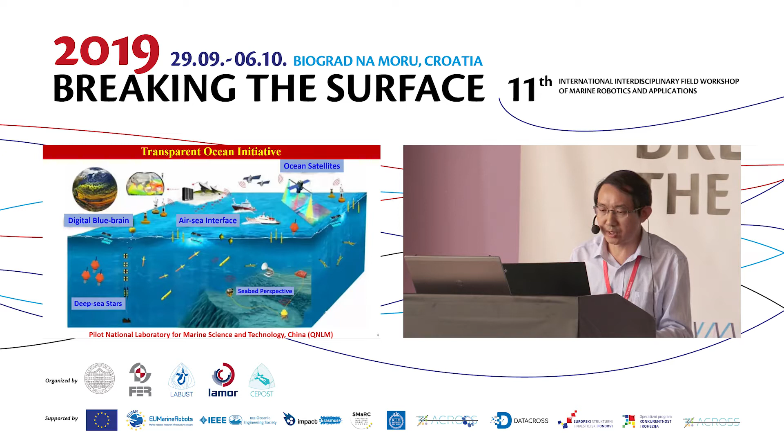the air-sea interface. We would also like to have some deep sea stars by using submerged buoys and some moving underwater vehicles. And finally, we would like to do some seabed perspective by using underwater intervention equipment, and combine all of them to enable a digital blue-brain. So this is the transparent ocean initiative in China.

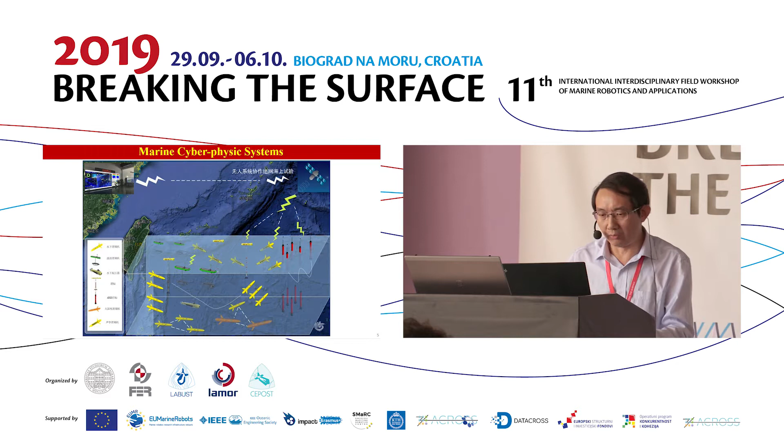In this context, the lab has already launched some marine cyber-physical systems, with gliders, wave gliders, underwater vehicles, surface buoys, Argo, and so on, trying to put them together to do some applications. This is one case, using two Sea Wing gliders to do the tracking and observation of an ocean vortex.

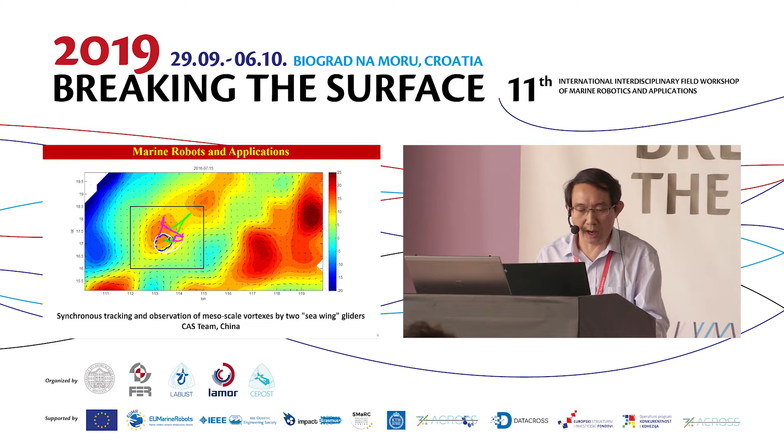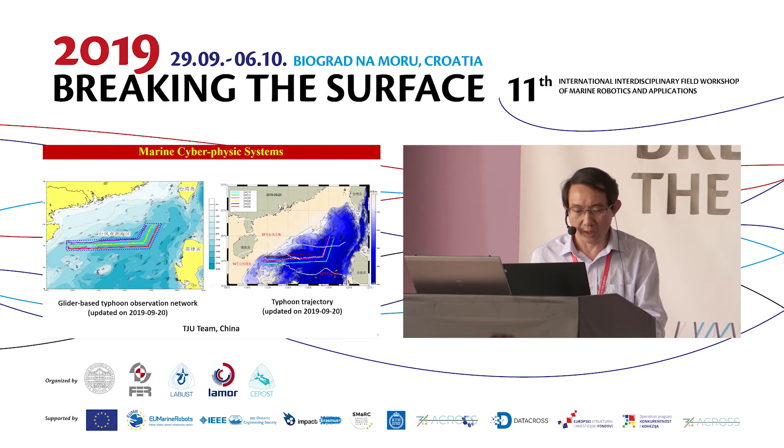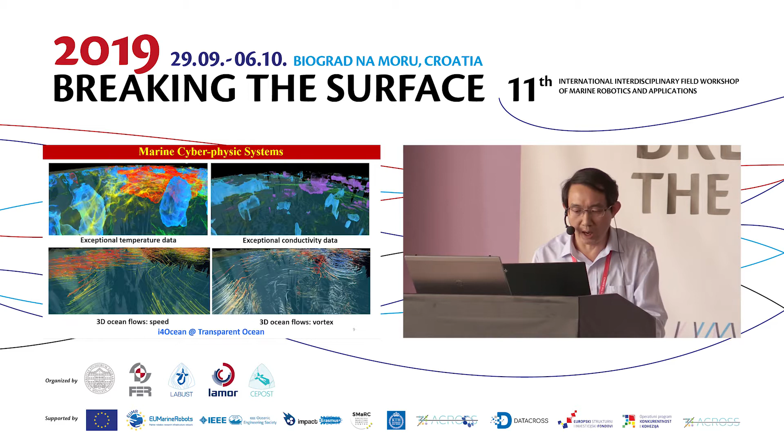In another case, a team in China also did some observation of typhoons by using a group of gliders. They also deployed some wave gliders in the ocean. By using all of these cyber-physical systems, the lab also presents the I4Ocean software to present temperature data, conductivity data, or 3D ocean flows, speed and vortex. So this is the context.

In this context of research in China on ocean science and technology, we would like to develop some new equipment. Of course, we already have some history building autonomous underwater vehicles. This is one case, the CR01 and CR02, which could dive to around 6,000 meters. And this is another series of autonomous underwater vehicles, which my group also participated in, from Zhishui 1 to Zhishui 6, over almost 15 years.

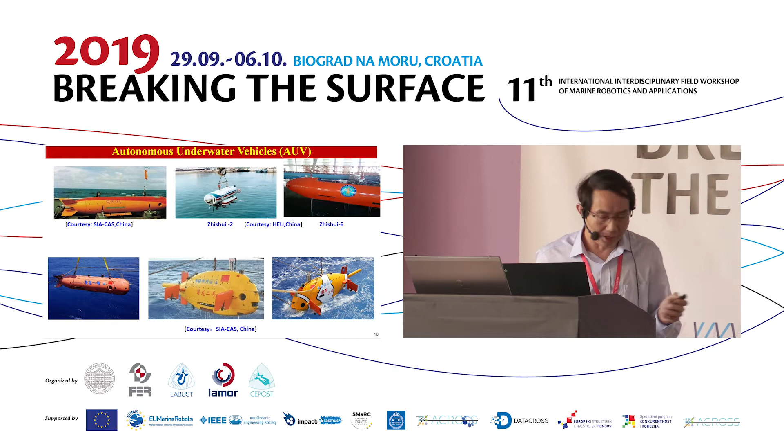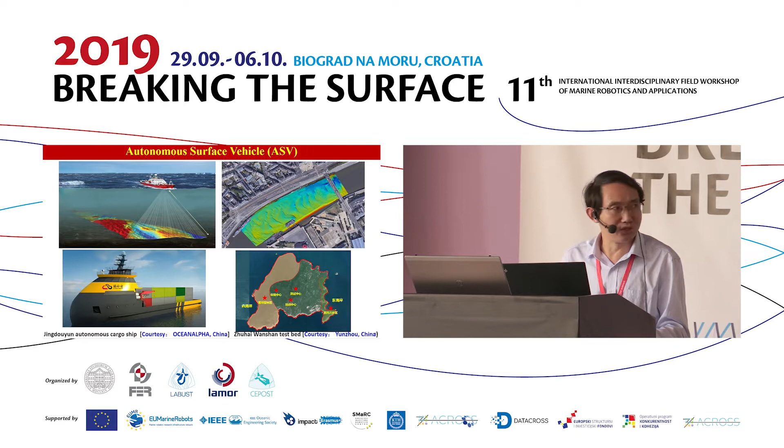In another city in China, they also developed other underwater vehicles named Qianlong 1, 2, and 3. For autonomous surface vehicles, we would like to use them for bathymetry of oceans and rivers, and develop surface vehicles from small size to big size. This is the first autonomous ship test bed in south China. I will present some details later. So this is the context of ocean science and technology in China.

Now, about my team and my research. I work at Huazhong University of Science and Technology, in the School of Naval Architecture and Ocean Engineering, where I lead the lab of advanced robotic marine systems. We have 2 research centers, one national level and one province level. We also have a towing tank since 1977, where we can do hydrodynamic tests and in-water tests for our vehicles.

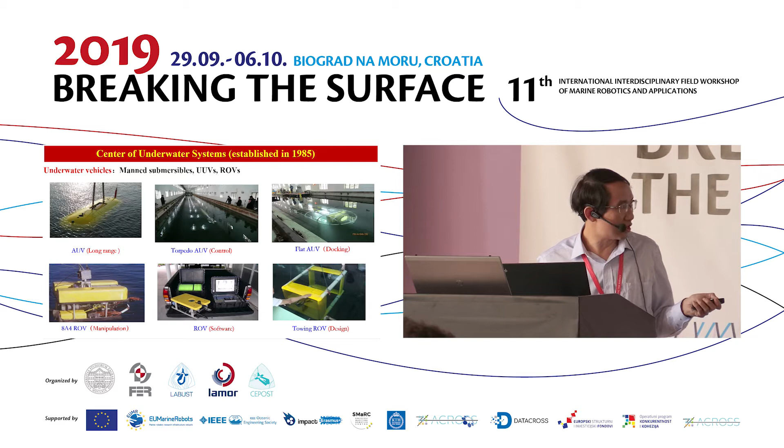Also in the school we have the Center of Underwater Systems, which participates in research on manned submersibles, underwater vehicles and remotely operated vehicles. This is the manned submersible, and this is the autonomous underwater vehicle. We also have a torpedo-shaped vehicle, a flat-shaped vehicle, and a towing ROV. So this is the history of the center in the school.

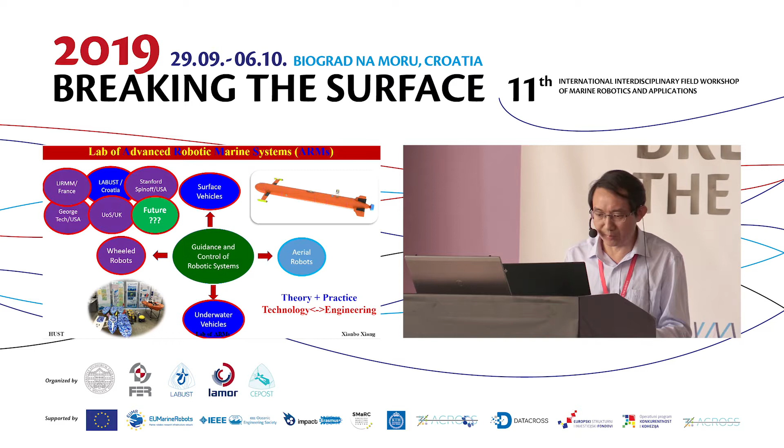As you know, I was one of the members of the European project FreeSubNet. When I came back in 2011, I tried to build the lab of advanced robotic marine systems, mainly focusing on guidance and control of marine robotic systems. We built some surface vehicles and underwater vehicles, use some wheeled robots to simulate the GPS-denied case for underwater vehicles, and also have some aerial robots. We collaborate with previous and new partners. These are some prototypes in our lab.

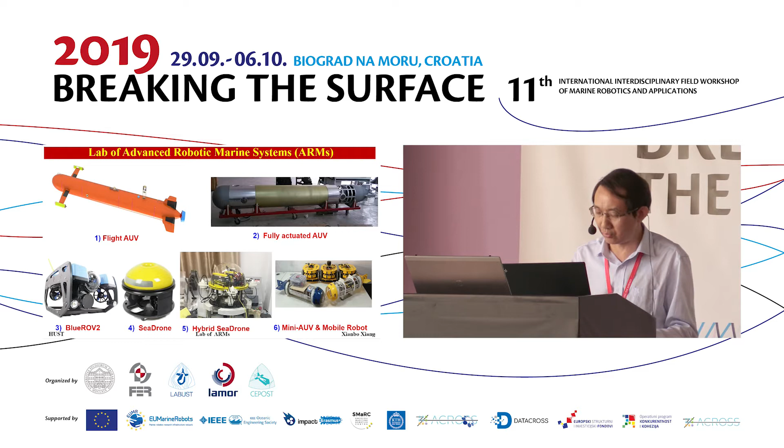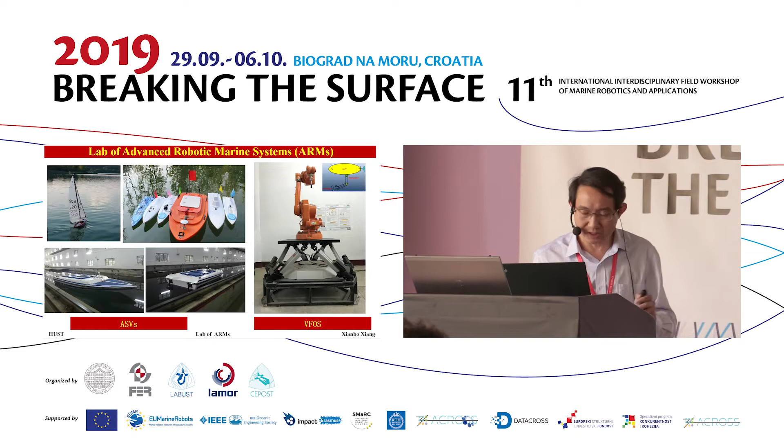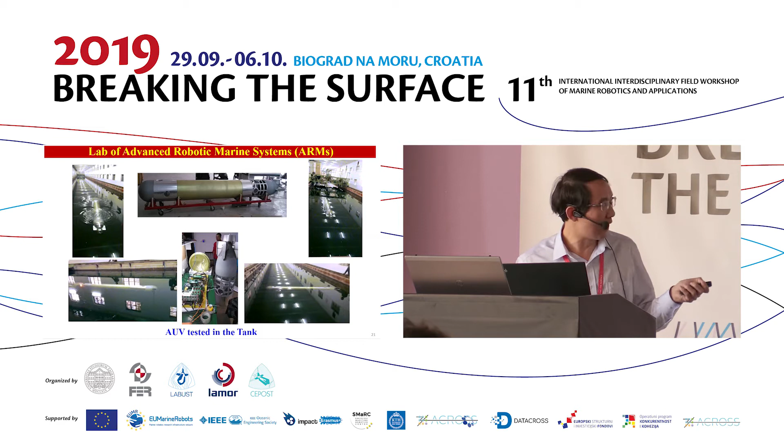The first one is a flight-type AUV used for underwater cable tracking, and this is a torpedo-shaped vehicle. We also have BlueROV2, SeaDrone, hybrid SeaDrone, and some mini AUVs to train students and do research. We also have autonomous surface vehicles, including a sailboat, and surface vehicles in small, mid, and large sizes. We also have a virtual floating operating system to simulate underwater intervention, and this is the AUV test in the towing tank. So this is a rough idea about the lab of advanced robotic systems.

So what we have done, especially I focus on the guidance and control of marine robots. First I will show you something about them.

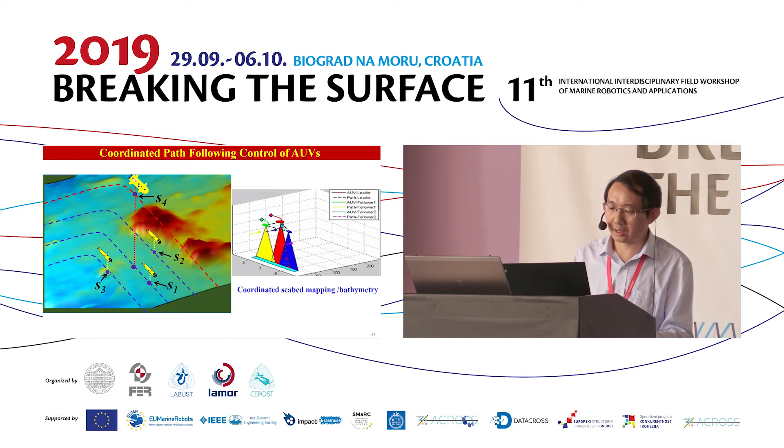The first case: if we would like to do coordinated seabed mapping or bathymetry, we may need a fleet of vehicles, either surface or underwater. So we tried to build some surface vehicles and did experiments with 4 autonomous vehicles in the lake near the university. In this case we tried to build a formation - a diamond formation - to check the coordinated control of multiple surface vehicles.

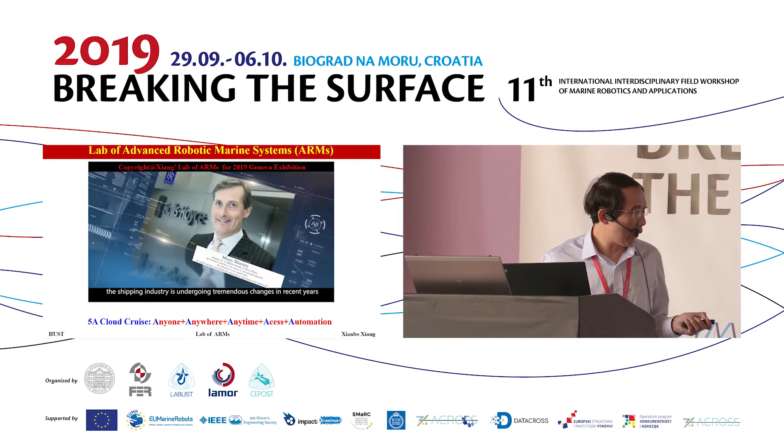This is the idea, and we also did experiments about this cloud-based cruise. It means anyone, anywhere, anytime can access the vehicles to control, manage, or schedule them. So this is the idea.

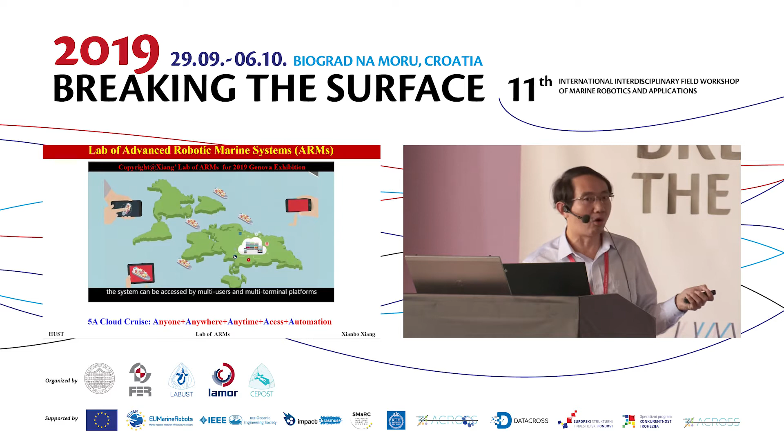We have surface vehicles or ships - if they can access the cloud, then we can control them. We can also have history feedback through this interface, and we did experiments to check this idea.

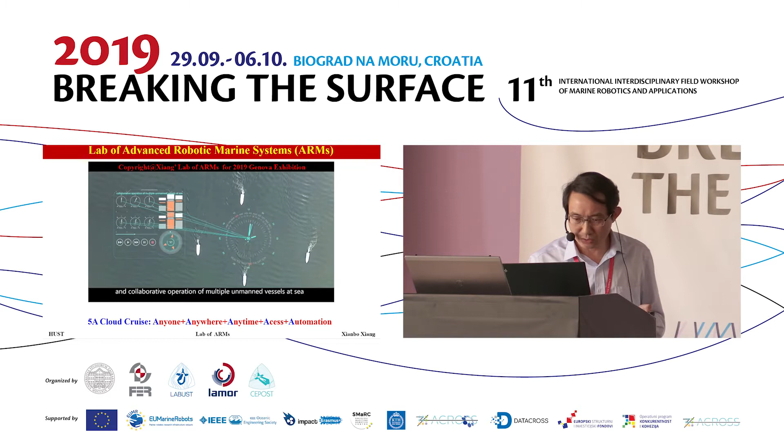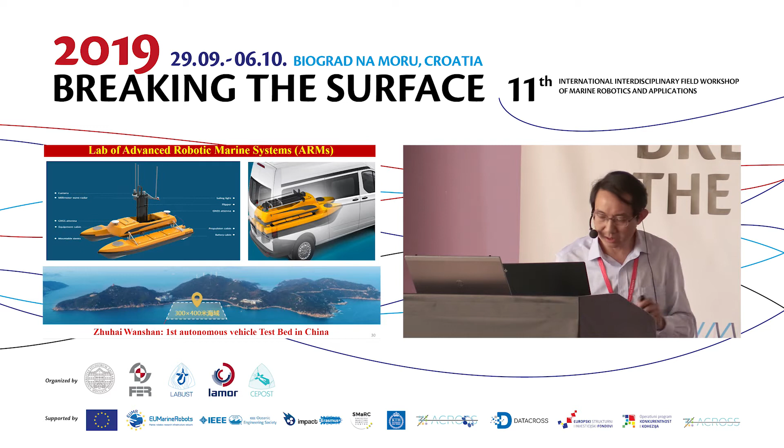This is one of them, and just this December we will test this system in the first autonomous ship testbed in China, in south China. We will use this small size autonomous surface vehicle for that.

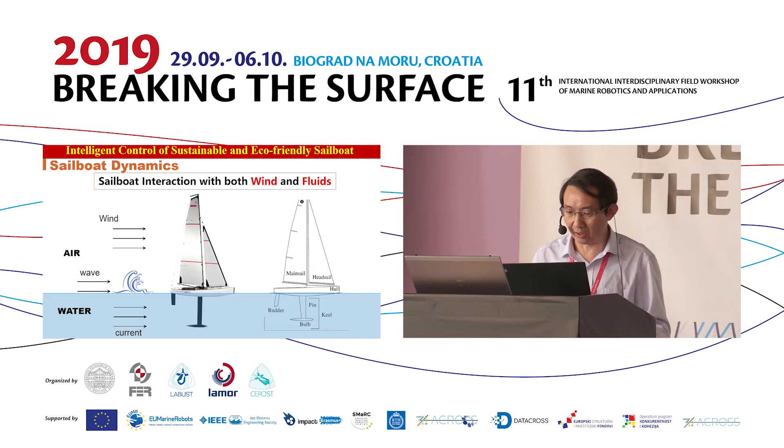We also did some work on sustainable and eco-friendly surface vehicles - this is a sailboat. If we want to control the sailboat, it's a little more difficult than the surface vehicle, because the sailboat has to interact with both wind and fluids. When we try to control the sailboat, we have to do zigzag or yo-yo maneuvers. So this is the difficulty.

We developed the sailboat in the team, led by Dr. Xiaolong Yang. We did some experiments to check the sailboat. This is a pre-planned path for them, and this is real data feedback for the control of the sailboat. You can see the sailboat moves from the start point and follows this kind of path by using the zigzag maneuver.

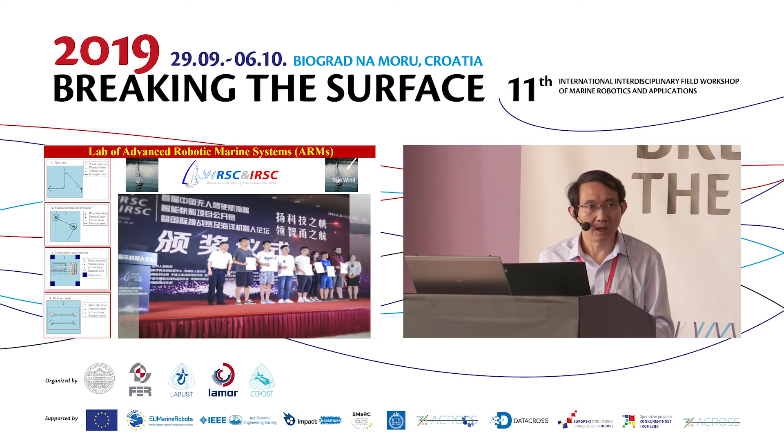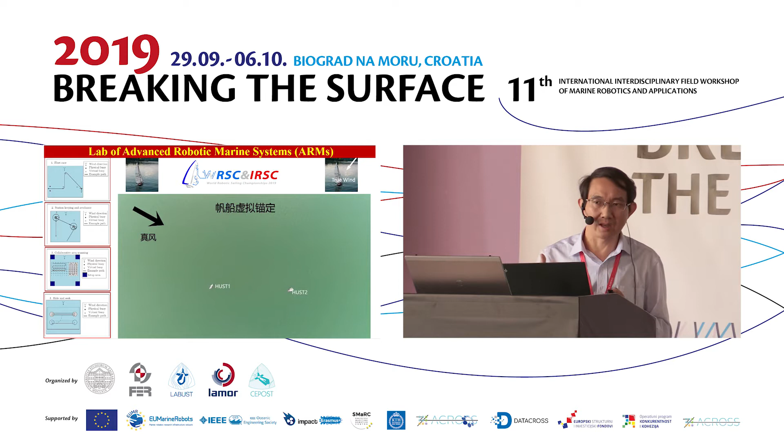About one month ago, we also attended the World Robotic Sailing Competition. Last year I sent two students to Southampton to see what a sailboat is, and this year we built a sailboat and attended the competition. We were lucky to send 2 teams, and both teams did well in the final competition - one got first place, and the other got fifth place. This was the first time for us to send students to build a sailboat and attend the competition, so I'm quite satisfied with the results.

This is another side to show that we are a little bit good at control of marine robots. This video shows some ideas to control 2 sailboats to build a fleet, to do station keeping, to do collaborative area coverage, and to do counterpart interaction between 2 sailboats. So this is the idea.

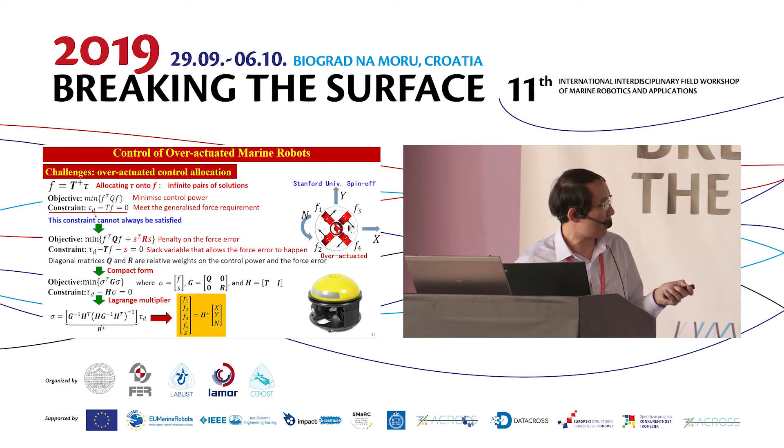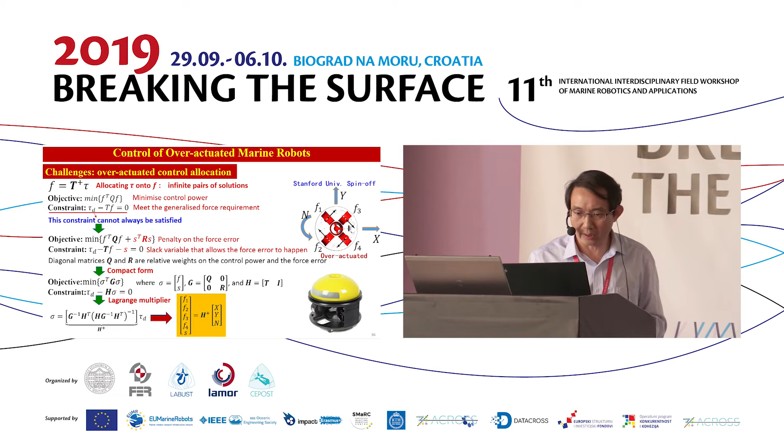We developed some control algorithms to control this overactuated vehicle, because in the horizontal plane we have 4 thrusters. So this is the case where we have to do optimal control allocation, and also try to do some saturated allocation using an optimization algorithm. This is the theoretical part, and we also tried to check it through experiments.

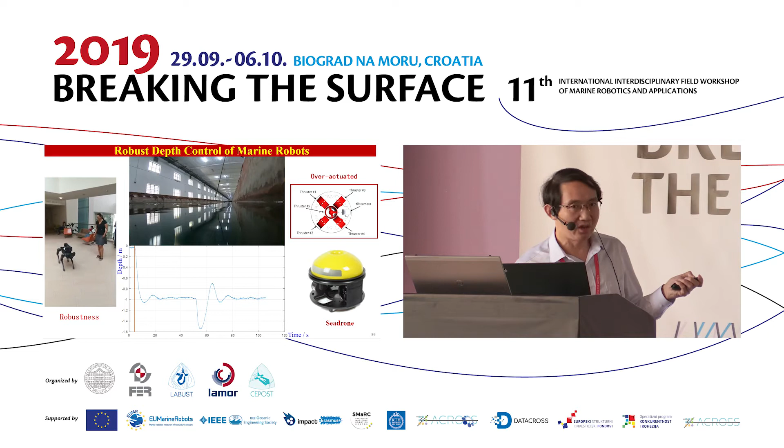In this case, we would like to control this underwater vehicle and send the command to set it to dive to around 1 meter. This is normal, not so difficult. But we try to make some disturbance, like the kickoff of the Big Dog or small dog. Here you will see the vehicle at around 1 meter, but we use a stick to make some disturbance, and then check the robustness of the algorithm. One student used the stick to push the vehicle, and the vehicle could recover to around 1 meter. This is one case to check the robustness of the control of marine robots.

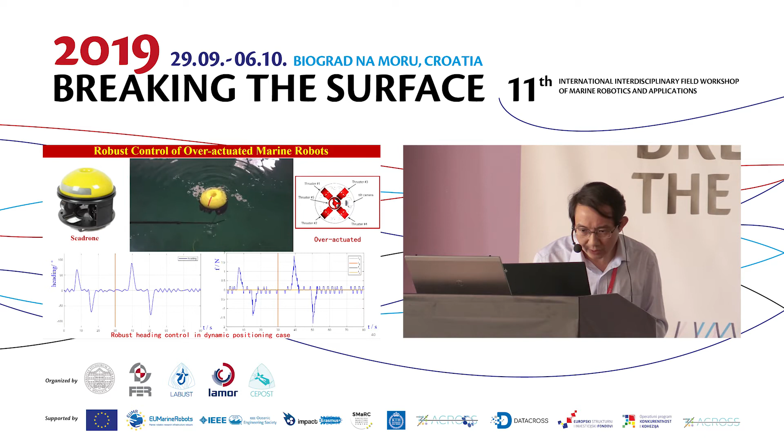This is another case to check the robust control for the overactuated vehicle. Previously we used robust control for the depth, but this one is for the horizontal plane. For the horizontal plane we have 4 thrusters, so in this case it's much more difficult - we have continuous disturbance. This is the orientation bar showing the orientation of the vehicle. Normally the vehicle has to stay around 0 degrees, but we have continuous disturbance to disturb the vehicle, and then the vehicle has to recover to the 0 orientation. There's something wrong with this data, I suppose.

This is the case I also showed a little bit last year. This year, one year more, we continued our work, so we can control the overactuated vehicle either in the depth plane or in the horizontal plane.

We also try to go forward using this vehicle and robot to do automatic docking of marine robots. For autonomous docking, if the vehicle could dock into the docking station, it could be charged and have data communication. Right now many research groups do this kind of work.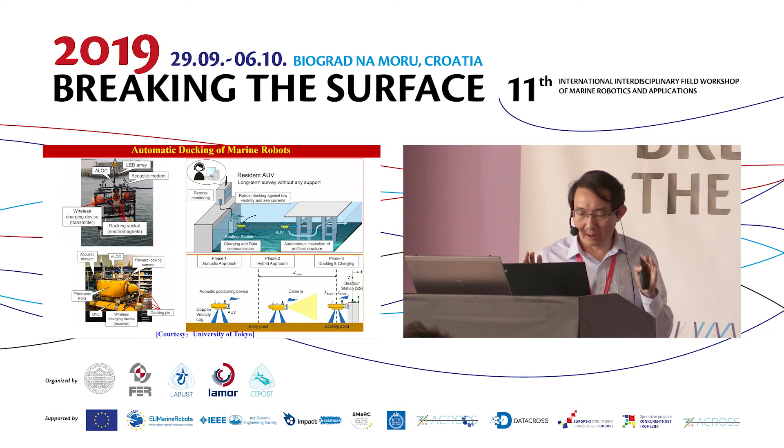In our group, we developed one docking station like this. We have some lamps over there, and we have the vehicle. In this case, we would like to command this vehicle to dock into this docking station. What I would like to mention is that normally for docking, the vehicle uses this kind of algorithm to move in this way.

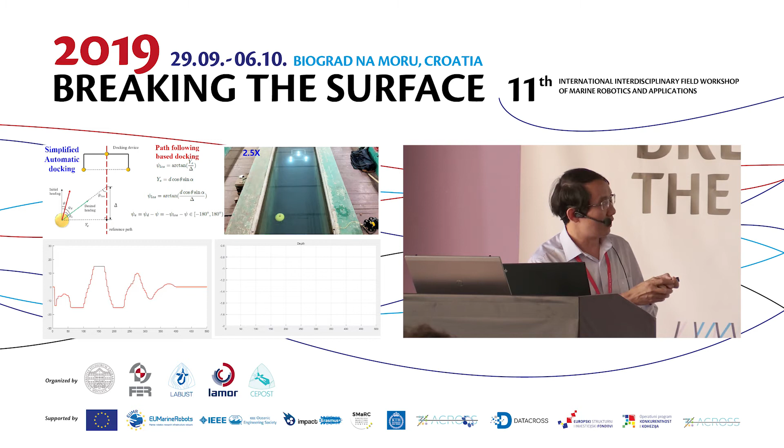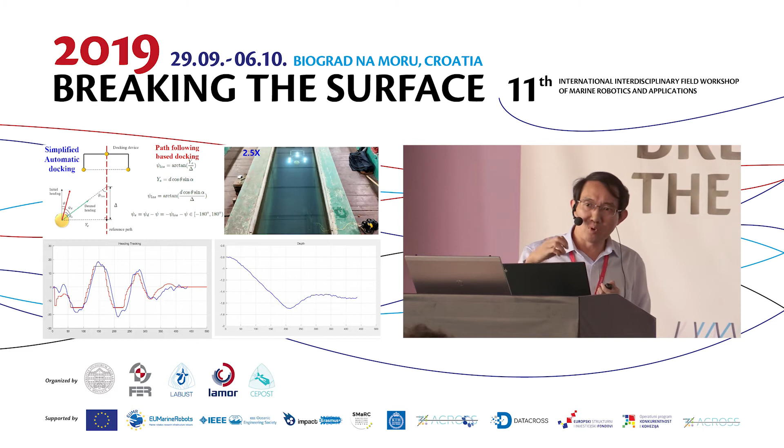So we have the experiments. What we need is offsets between the vehicle and this center line, and also some orientation angles. By using this, we develop the modified path following algorithm. So we can say this is the case for the automatic docking. This is a snapshot for automatic docking from 1 second to 46 seconds, and also we did more for the dynamic docking.

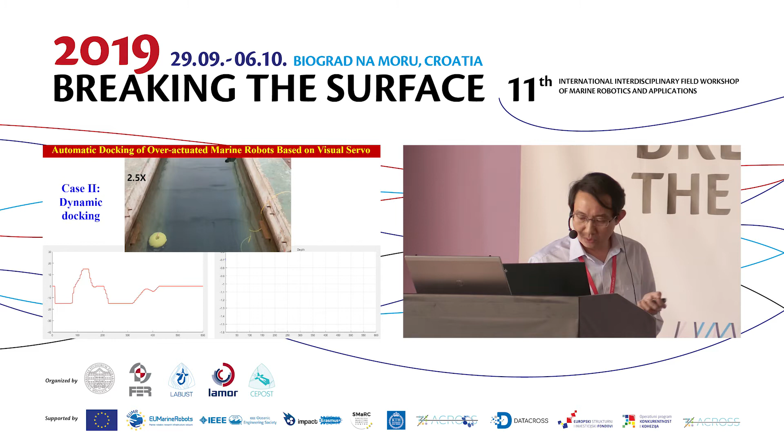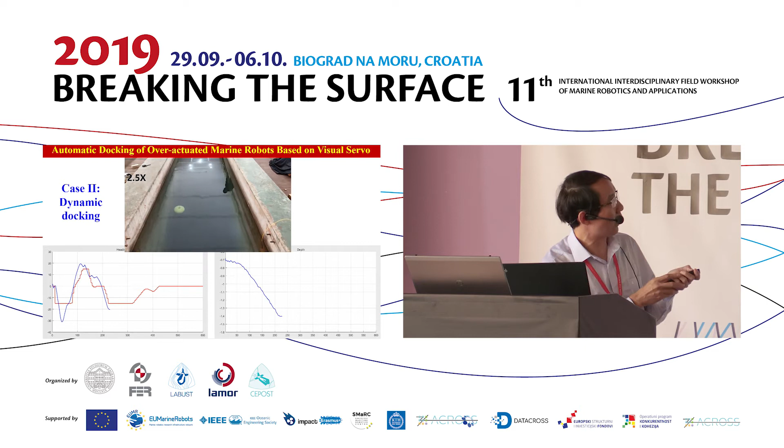Yesterday you also saw some presentation about dynamic docking for the remotely operated vehicle. So we use this small size underwater vehicle to do the dynamic docking. What we do is have one student control this docking station to move it, but the vehicle has to dock into this station by using the visual servo feedback.

This is the case. This is real data, and this is depth. This is for the orientation of the vehicle.

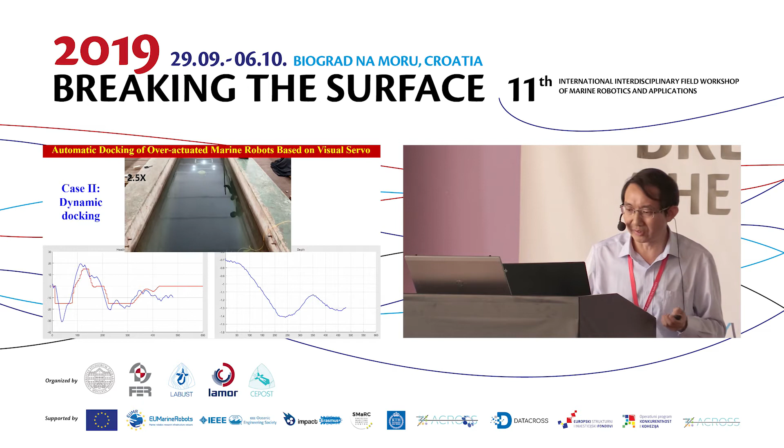So this is a case that we developed in China for the control of marine robots. So this is one part of my presentation.

What's the motivation? There are around 263 subsea fiber optical cables, with total length around 1 million kilometers by 2015. For example, from China and to here, we have the communication. Most international network communication, more than 95% of it, goes through subsea fiber optical communications. So it's quite useful and quite important. We also have many links between China and Japan, and some other communication networks. So this is the case for the global subsea fiber optical cable communication.

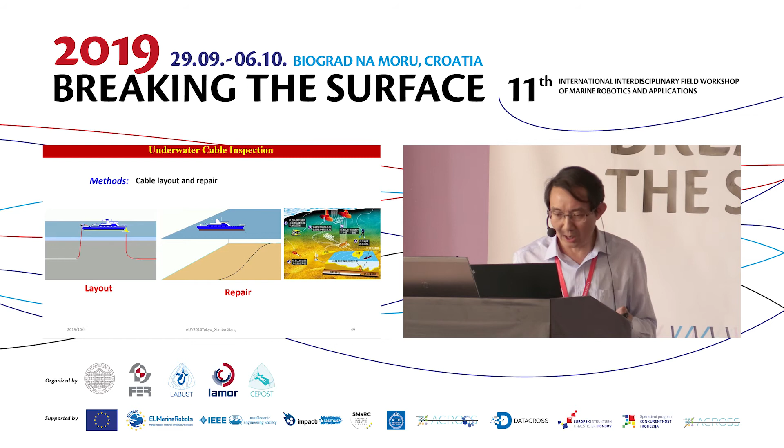Before I go to the aspects of cable inspection, we would like to show you something about the layout and repair of the underwater cable. So this is the layout of the underwater cable, and this is the repair of the underwater cable. But if we would like to repair the cable, we have to localize the cable so that we could inspect it. So this is a challenge.

Of course, we could use some remotely operated vehicle, but this depends on the company of the ship, so it's quite heavy cost. For the diver, they could only work in shallow water. For the ROV, it's high cost. If we have an autonomous surface or autonomous underwater vehicle to do this job, to localize the cable and inspect its condition, this would be nice. So this is the motivation for why we would like to develop this kind of system.

This is one challenge. Another challenge is that most of the fiber optic cable was buried to avoid damage. In this case, ordinary acoustic sensors, optic sensors, or lasers can't work for them. So in this case, we would like to use a magnetic sensor to inspect or localize the very thin telecommunication cable.

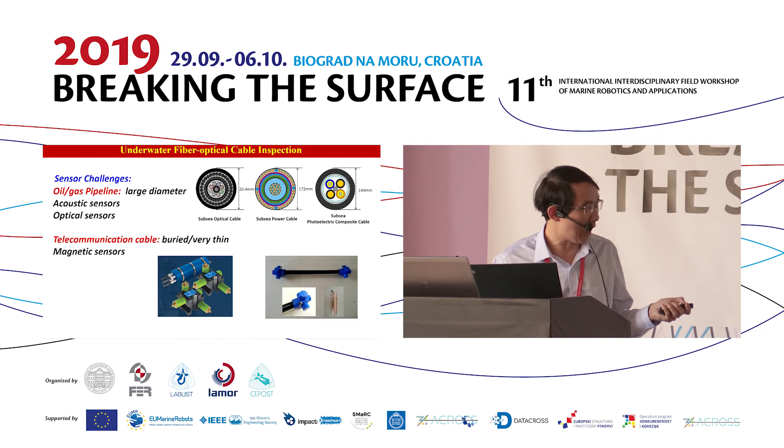So with this idea, we try to develop this kind of flight-style underwater vehicle mounted with two magnetic sensors to localize the underwater cable. This underwater cable is buried and very thin, so we have to use the magnetic way in order to allow us to inspect it. Okay, so we have the motivation, we know the challenge. So now we go to

the implementation. So if there is a flight-style vehicle and this is a cable, what we can do is turn this problem into the path following style. We could take it as a path, but this path is not known a priori, so we have to localize it and follow it at the same time. So this is a challenge. We would like to use these two magnetic sensors to localize this cable and to know the offset and the orientation offset between the vehicle and the cable.

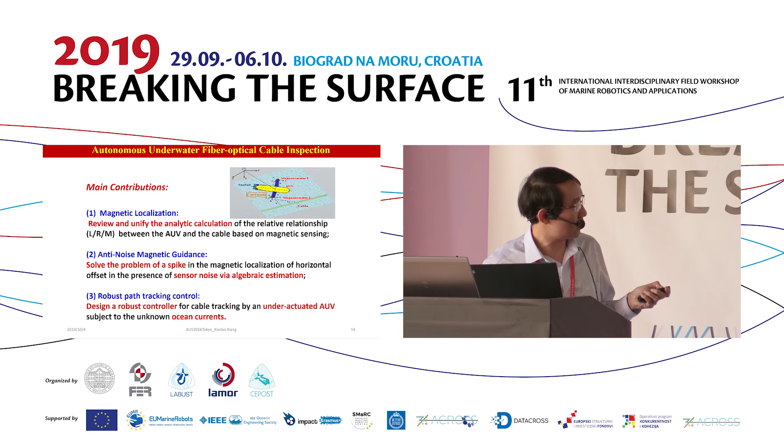So we did some theoretical things and we published some papers, but the main contribution is that we developed the magnetic localization algorithm, we also tried to address the noise case, and then we developed robust path tracking control.

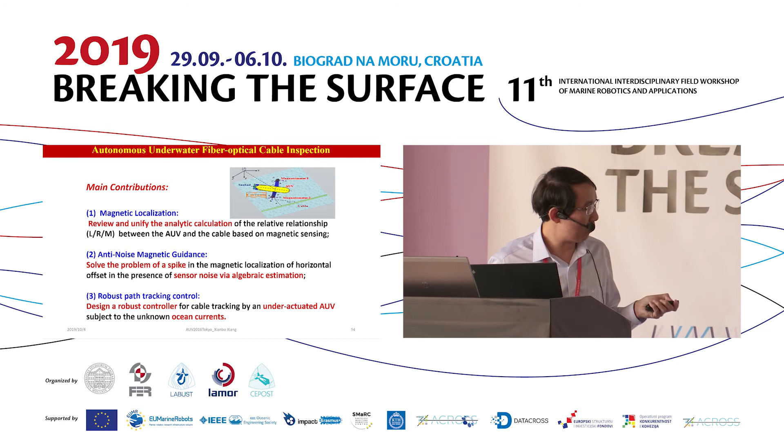So for the magnetic localization, we divided this case into three parts. This is a buried cable, and this is the vehicle. Whether the cable is on the left side of the two magnetic sensors, on the right, or in the middle, we unify the localization algorithm. This is the first time for us to develop this kind of algorithm. This algorithm has been reviewed by the experts and published in the IEEE Journal of Oceanic Engineering.

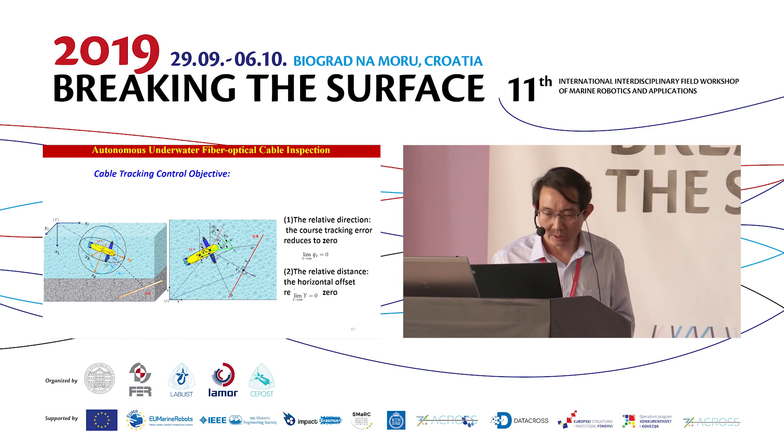And we also have some method to deal with the noise of the magnetic sensors, and we try to develop the robust controller to enable buried underwater cable tracking. Okay, so this is one of the numeric results. This is a cable, this is a vehicle. The vehicle could localize the cable and follow this cable to do the routine inspection. So this is the idea.

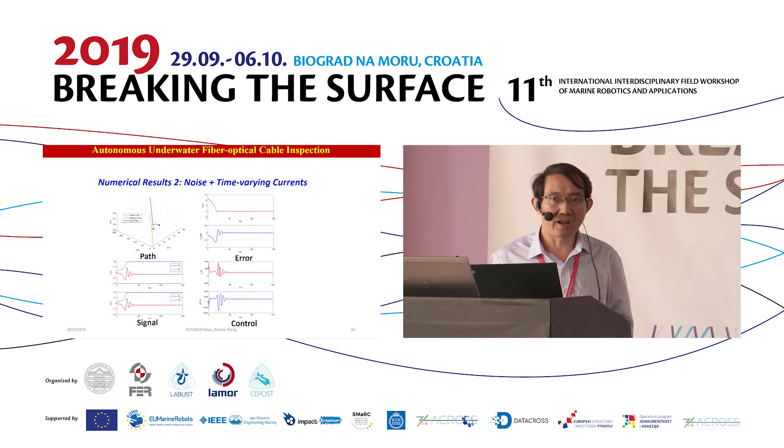And we also have the numeric simulation for the noise case and the time-varying current in the sea. So this is the other case where we have the cable and the vehicle with one pair of magnetic sensors. This is the control performance, and this is the error. Okay, so this is the theory.

So from theory we have to go to practice. We developed the localization algorithm using a pair of magnetic sensors, so what we would like to do next is to develop the real vehicle. This is a vehicle we designed in China, and hopefully it will be done and we'll do the lake test next February. I hope that we could have a chance at the next BTS with our team members to share the information with you.

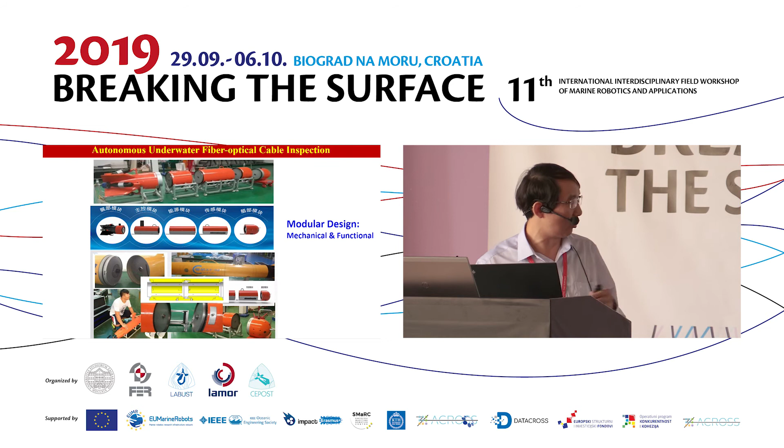So this is a vehicle we designed, and what we would like to share right now is that we work together with one company. We developed this vehicle, from the mechanical parts to all the controller and sensor deployment, and we collaborate with one company in China to do the modular design from both the mechanical and the functional point of view. This is why we would like to use this one: we have this magnetic sensor, so we put this as a module.

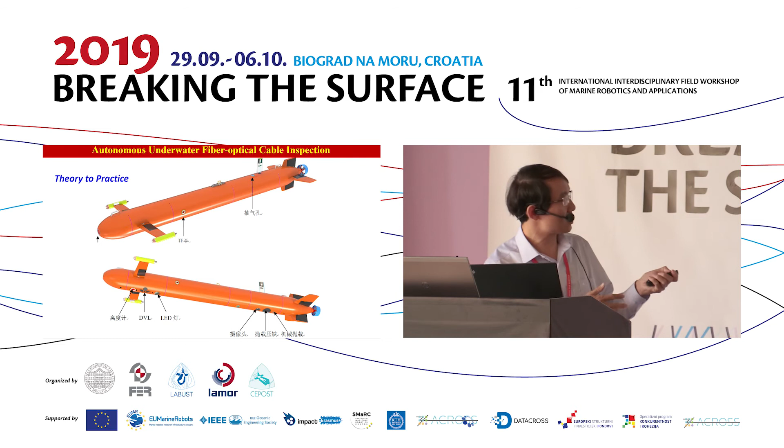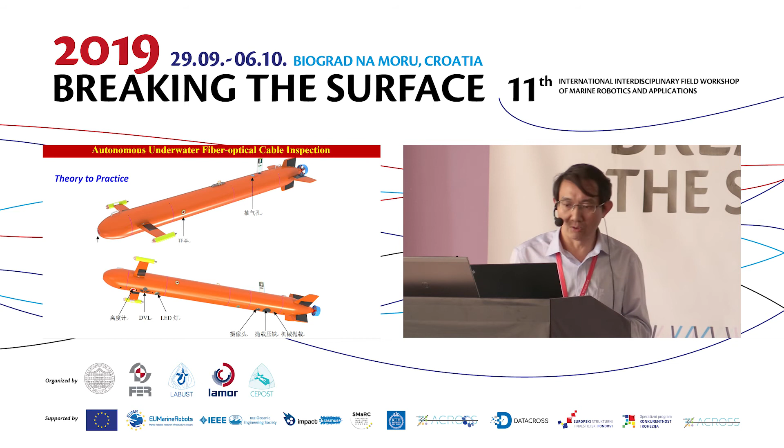Without this module, this is an ordinary flight-style AUV. With this magnetic sensor part, we can integrate it. So this is why we'd like to develop this kind of vehicle with the modular design. In total we have five modules. The second part is for the magnetic sensors, and we have cabins for the batteries, the controller, the navigation sensors and other sensors. So this is the modular design for the vehicle.

This is already on the way. We will see it next February; the deadline for the test of the vehicle is next February, so I hope this will be done perfectly. And with this vehicle, if we mount some magnetic sensors onto it, we could localize and inspect the cable.

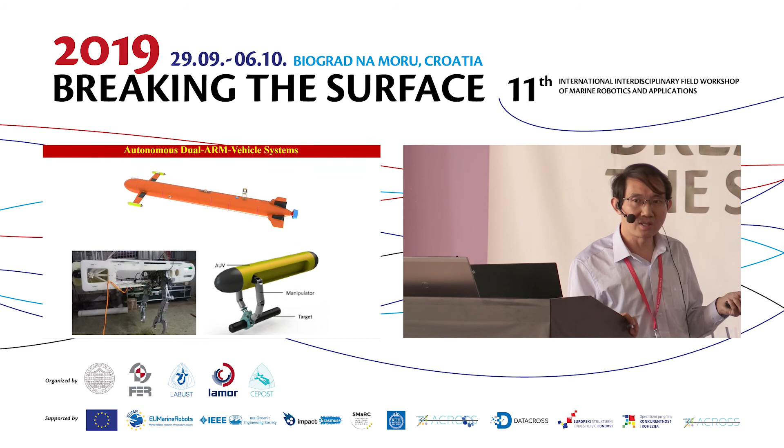But you know that in the US, there's a DARPA program and there is the Angler project. They also would like to develop two manipulators. I suppose it is happening in 2018. What we did for this one was in 2017, so we already developed two manipulators. So this is the case.

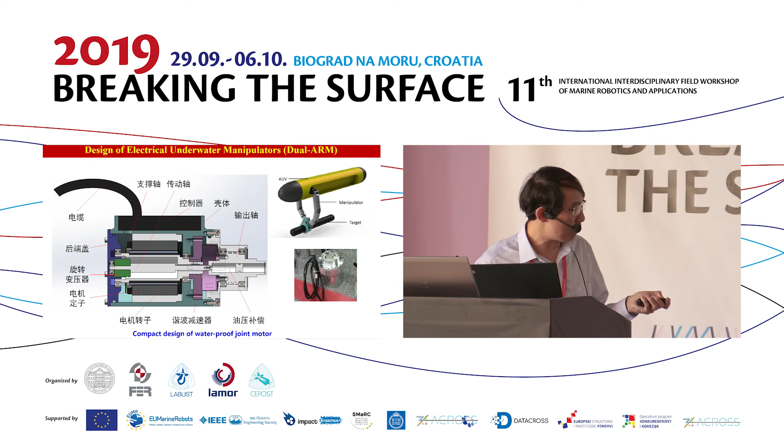So in order to develop the dual arm and vehicle system, firstly we have to design the motor to get a compact design of the waterproof joint motor. So this is the case, and this is a final prototype for the waterproof motor. Okay, because the time is limited, I skip a little bit.

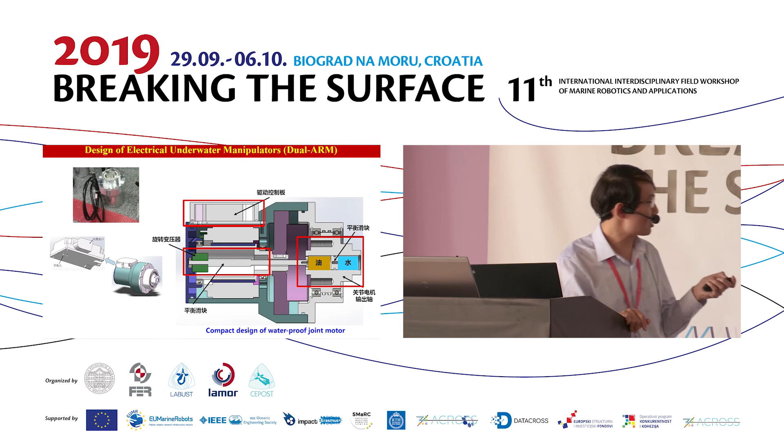What we do for the underwater arm is that we also put the drive control board just attached to this motor. Because this is the first time for us to do this research, if there is some problem, we can easily open this cabin and download our algorithm to do a little bit around the electronics board around here.

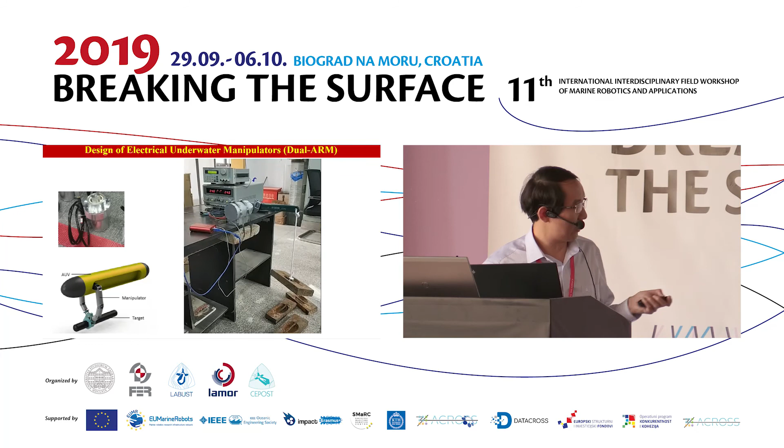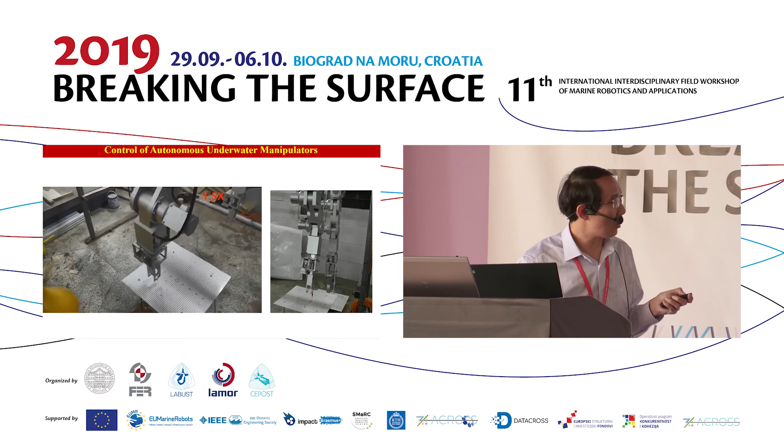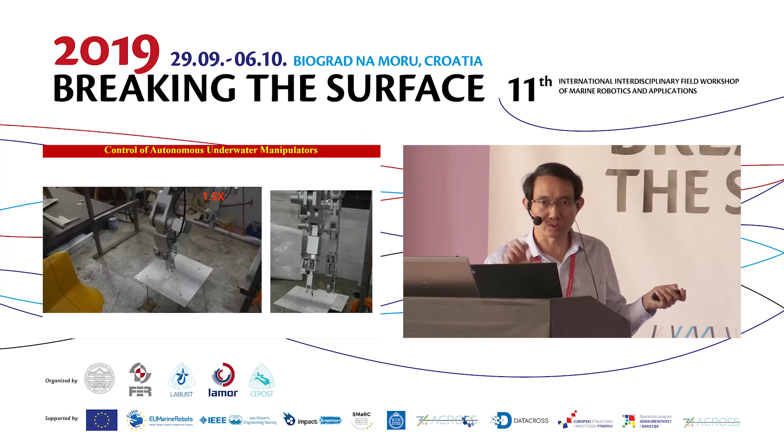So we develop it, and we also do the test to check this kind of underwater motor for the final prototype. So this is an experiment, and then finally we assemble all of the joints. We have 5 joints, so we have 5 motors. We put them together, and this is a prototype, and we do the point-to-point calibration for the manipulator.

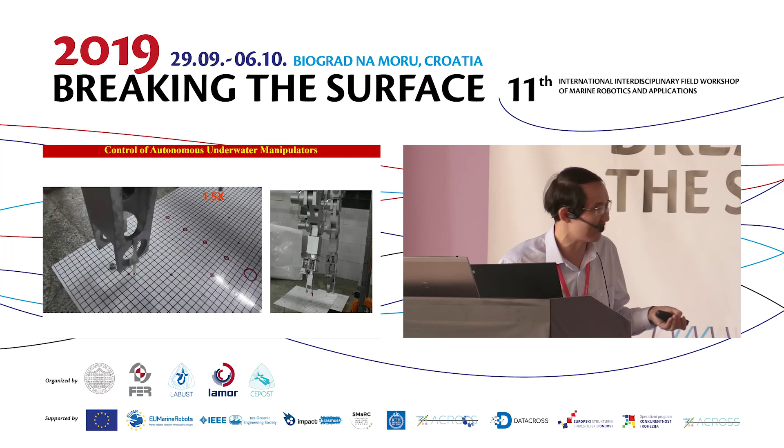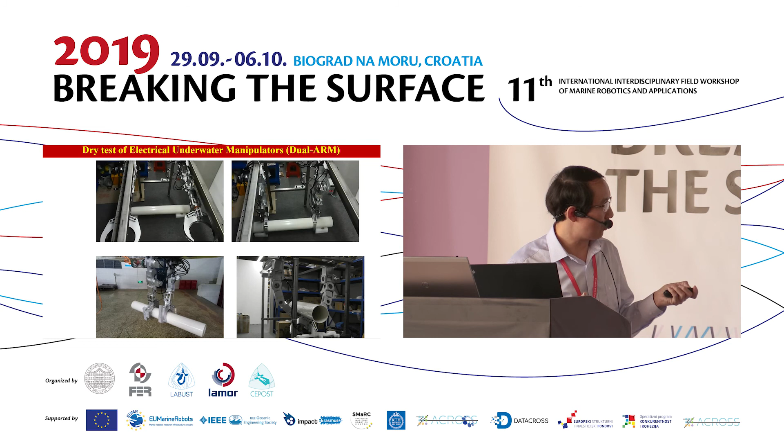So this was done, I think, last December, just after the IEEE USYS conference. And also we do some dry tests for this kind of electric underwater manipulator. There are two of them, so dual arm. We do some dry tests, and this is a video for the dry test.

So this is the case that we have two arms, and we try to do the autonomous intervention to take this object. And also, what we would like to do is make a hook, something that's not only to precisely manipulate something, but also do some hook to get some objects. So this is another case. We also do the validation, do the experiments.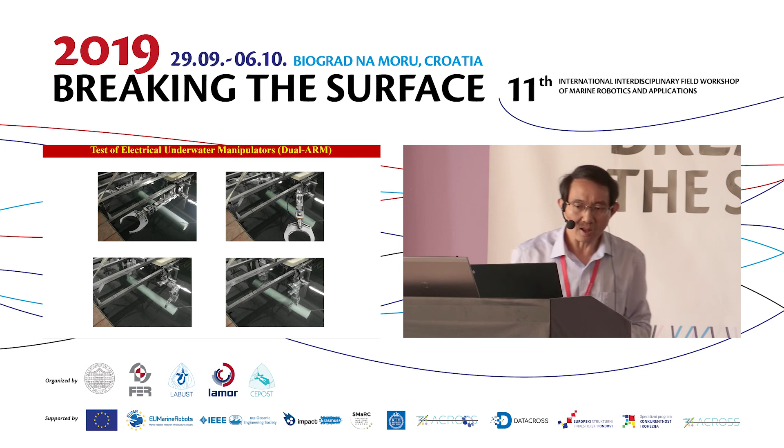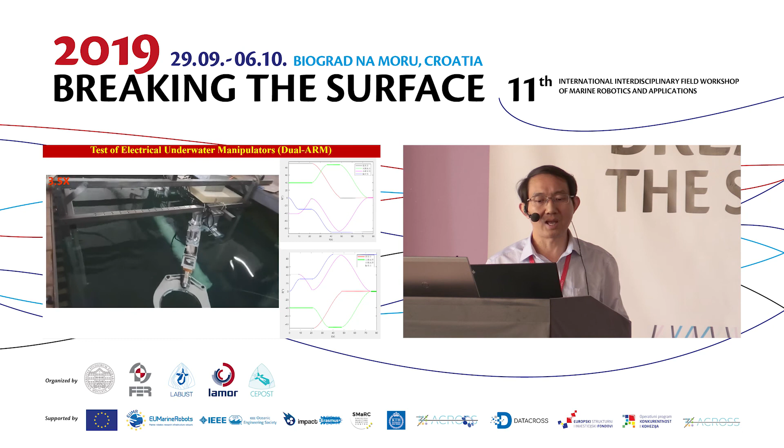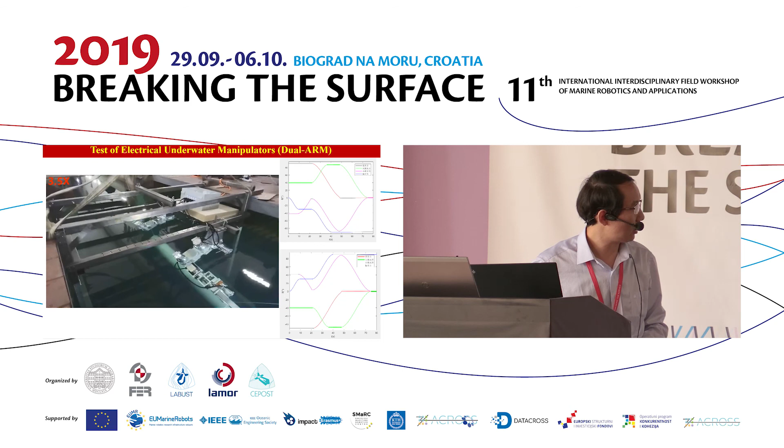And finally, we do the in-water test. Firstly we develop a framework to mount two arms and do the in-water test. And this is the in-water test experiment, and these are the real data for each of this model, the rotation angle, and also I suppose there's some force feedback. So this is the case for the in-water experiments for the dual arm underwater intervention.

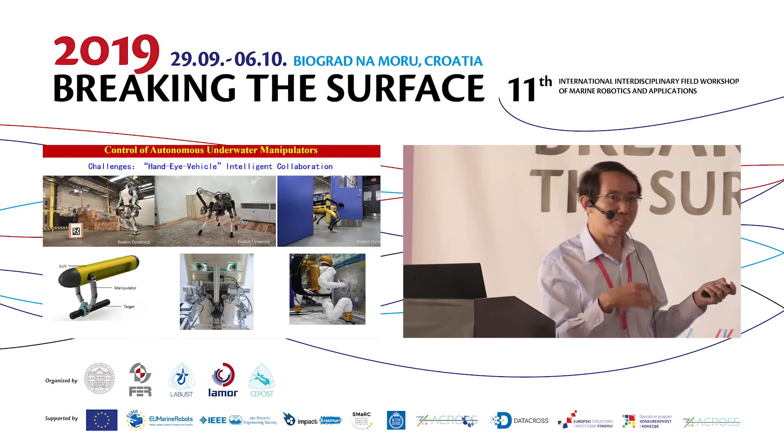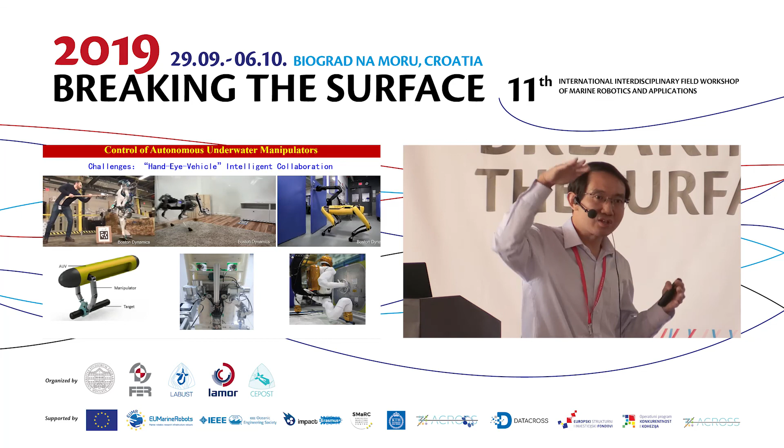So finally we try to mount all of them to the underwater vehicle. But what I would like to mention here is the challenge of this kind of floating-based underwater manipulation. This one is ground-based, so there is always support, even with some difficult maneuvering. But for this one, because it's in water, we have to develop this whole system as a floating system. So if the manipulator moves, then the vehicle could be disturbed. This is quite difficult for the marine robotic community.

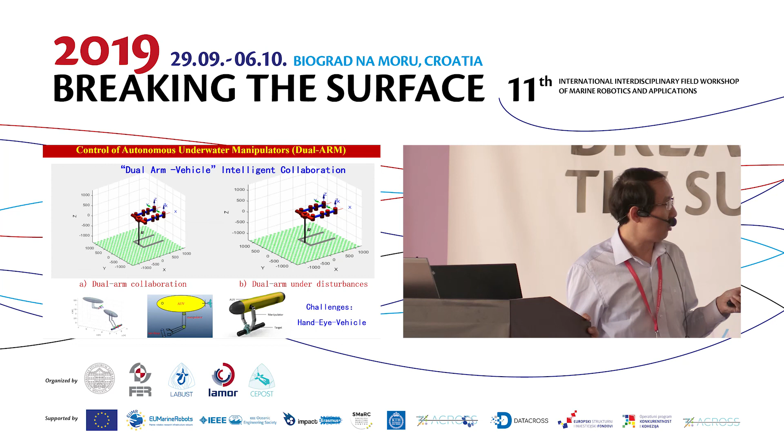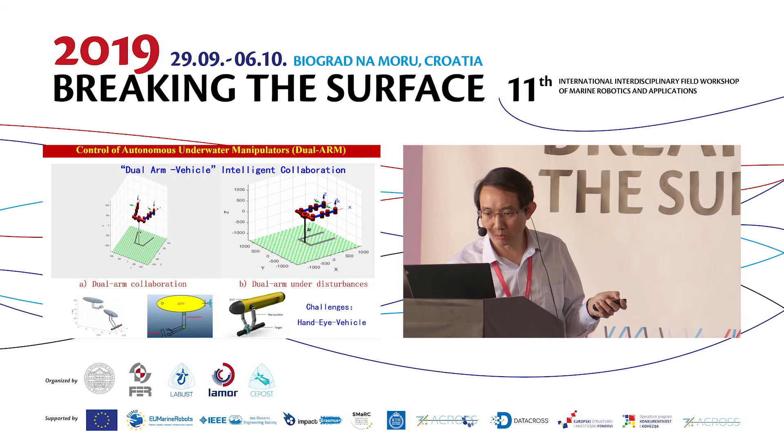So what we would like to do is firstly to do the simulation, without disturbance and with disturbance. So this is the case with disturbance. Here the base is fixed, but here the base is moving. Through this kind of simulation, we would like to check the algorithm for them.

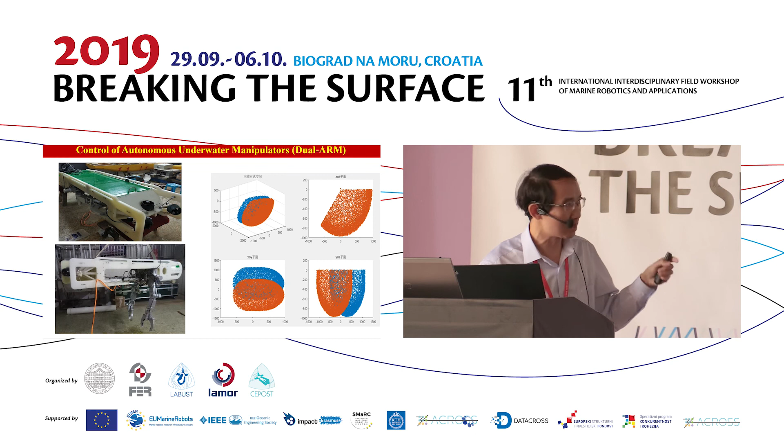And finally, we mount both of the arms on the underwater vehicle. We also have some vision feedback, but right now we didn't do it. We just integrate the two arms and the vehicle together, and we do the experiment. Next step, we will do the visual feedback to coordinate the dual arm and the vehicle together. So this is the workspace for the arms mounted on the vehicle, so in this workspace, the vehicle could do the manipulation.

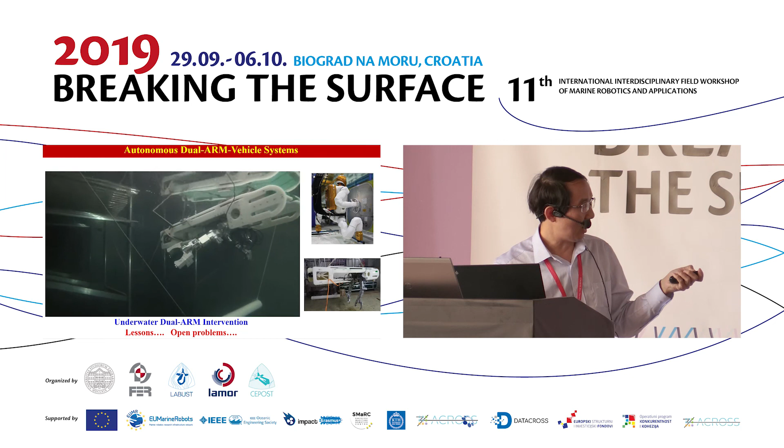So we have the experiments in the towing tank. This is an underwater vehicle, and these are the two arms. In this way, we do the experiments in order to do the dual arm underwater intervention. But of course, there are many lessons learned from this project. Because time is limited, we can talk a little bit if you are interested. And there are also a lot of open problems for this kind of research in dual arm underwater intervention.